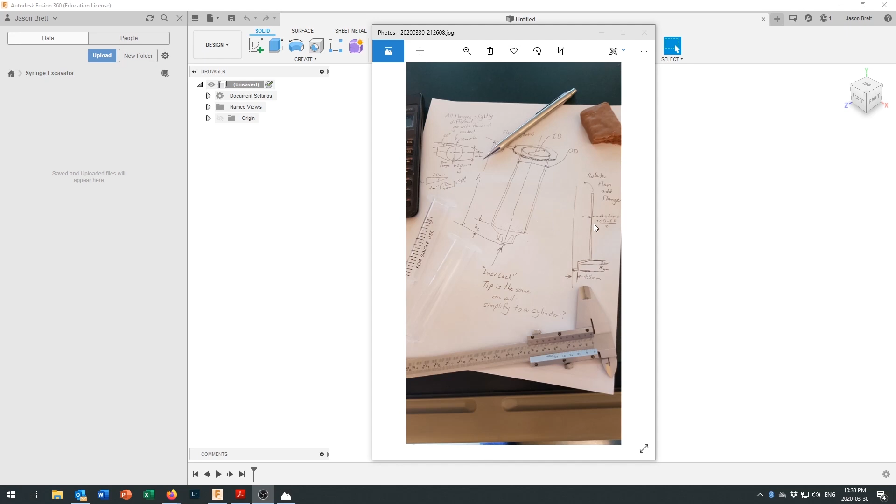And then what we can do is come back and pop the top flange on at the top. So I've gone through, taken some measurements, and taken a few more measurements since I did that drawing, so I've got my notes on there. I'm just going to drag it off to the side and put that on my other screen so I can get started here with a new design.

What I'm going to do is start with a new design, and I'm just going to save that as syringe body before I get started.

And you know what? I'm going to start with a 30 milliliter syringe body right here. I'll model 3 different syringe bodies, but I'll make it parametric so that once I've got one of them done, the rest should be easy to do.

Even when we're going to use the revolve command to create our part, we are going to start off by going into sketch and creating the sketch of the profile that we want to revolve. So let's create a sketch, and you can pick whatever plane you want to work on. When it comes time to assemble them, it's not going to matter that much.

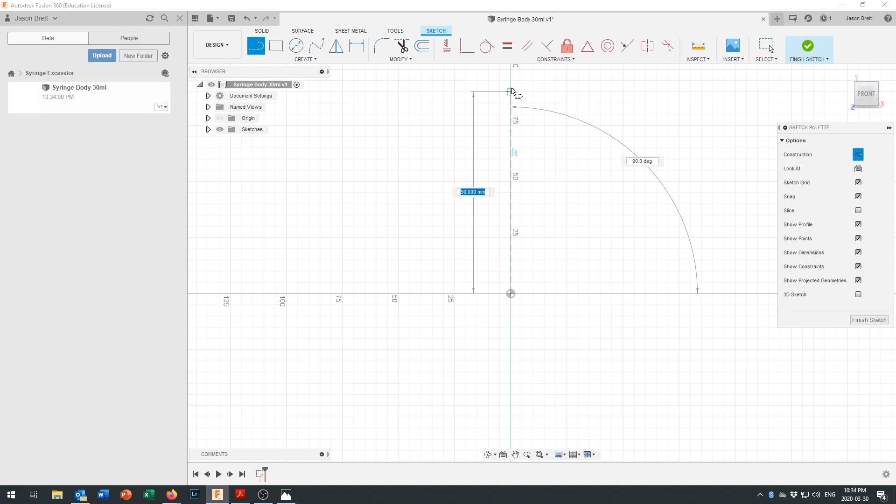Let's give ourselves a construction line to work around right here. We'll take that line right there and start right at the origin. Our tallest syringe is the 30 milliliter syringe, and it's 118 millimeters high. So let's just set that line right there and click that little green check mark. Now we've got a construction line that we can start working around.

I will turn off the construction right here so that we can get started creating our profile. Now I've taken some measurements earlier, and like I say, we're going to simplify this tip right here. So what we're going to do is just draw a line right here, and our profile is going to come out this way.

Officially that's going to be 4.5 millimeters. We'll come back and tidy that up in just a moment. Then it is going to come up this way, and it is going to come up 8 millimeters. So I'm just going to put that in right there.

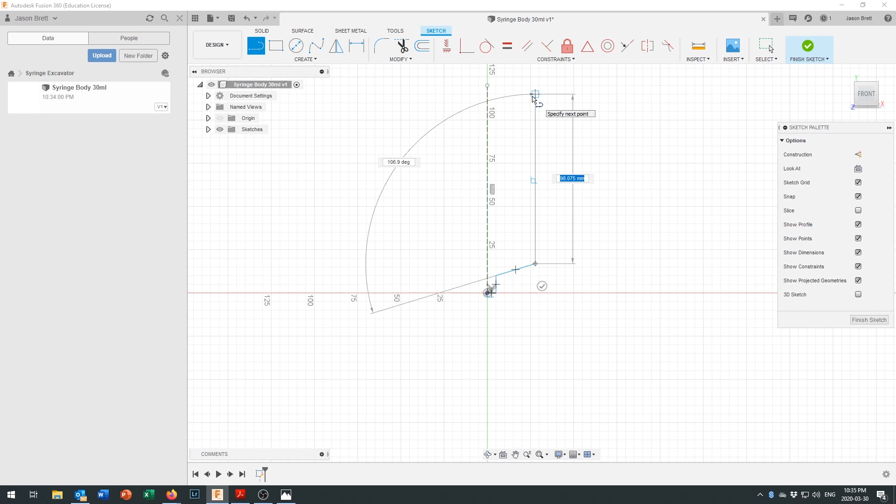It is going to come out at an angle this way, and I don't want that to lock to any specific angle right now, so I'm just going to hit that right there, and then it is going to come up to a height somewhere right in here. And now I'm going to say that's okay.

Now I'm going to come back and tweak those dimensions that I've got coming along right here. So I said this one right in here was not 5, it was 4.5, and that'll be pretty standard for most of the drawings. This one right here was not 9.8, but it was 8 millimeters.

And we've got a couple of ways of dimensioning this. You can dimension the angle, and what I found was that you can dimension from this point to this point right here. You can get an aligned dimension. We don't really need that.

We know that that is going to come up here, and that actually from that 8 millimeter tip where that comes up, that only comes up about 2 millimeters. Okay, now that shrunk that in a whole bunch because it was keeping that angle for it, but that's okay.

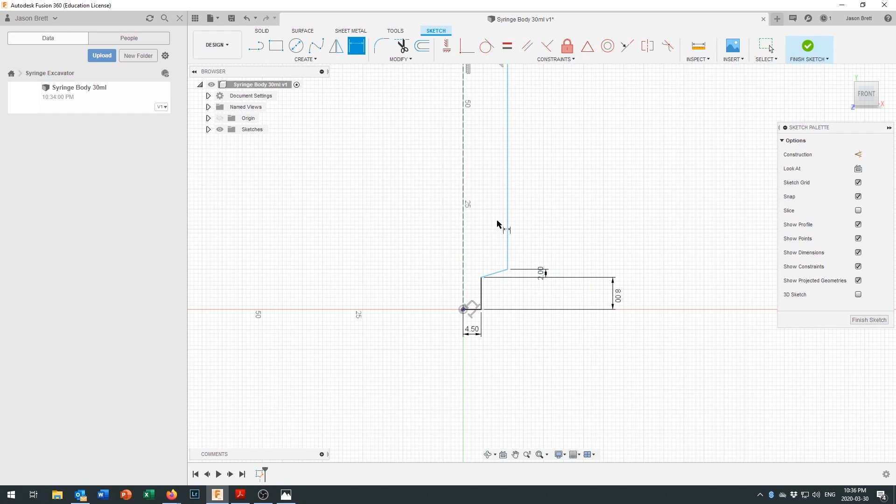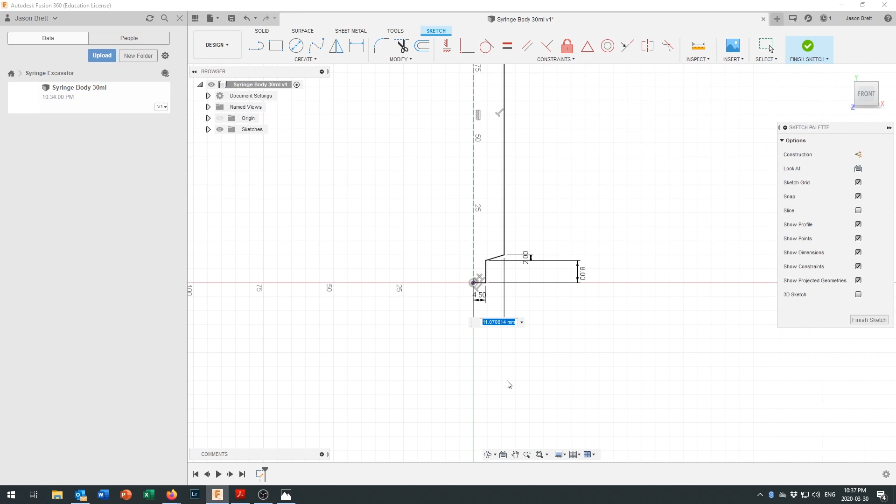That's not to worry right in there, because what we're going to dimension now is our distance from here to the center line. This is going to form our outer radius, so half of our outside diameter. On the 30 milliliter syringe, it has an outside diameter of 23.5 millimeters. So this will be 11.75 millimeters out to right there. And that's going to give us our 30 milliliter syringe.

Right, one more dimension, the height. The dimension from right here down to right there is, on the 30 milliliter syringe, 118 millimeters.

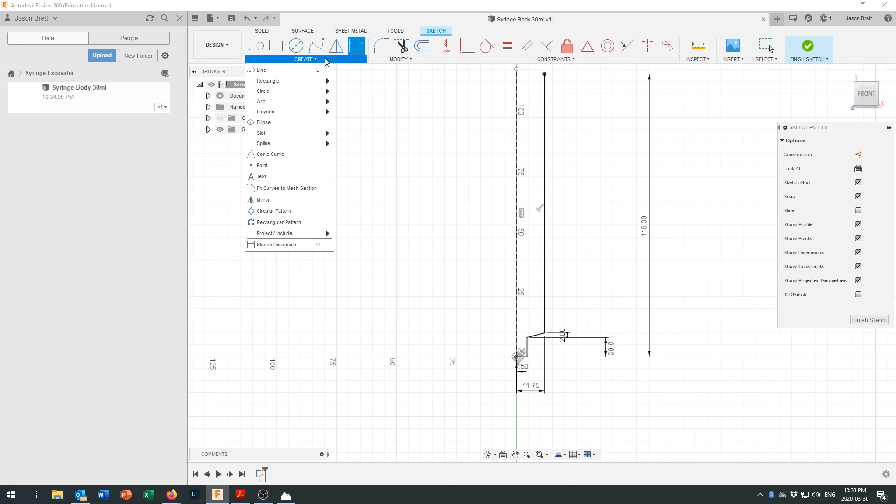Okay, now this line right here, we've got a couple of different things that we can do to draw the inside part of it. What I'm going to try first is doing an offset of it, because I took a couple of measurements, and pretty standard wall thickness is about 0.75 millimeters. So if we take that line—I can never remember if it's under create or modify.

There you go. You could just type O for offset if you want, and take this line right here, and we're going to drag it that side. As you can see, it's a pretty smart offset feature. It actually comes up and inside right here. So I'm really, really liking that feature.

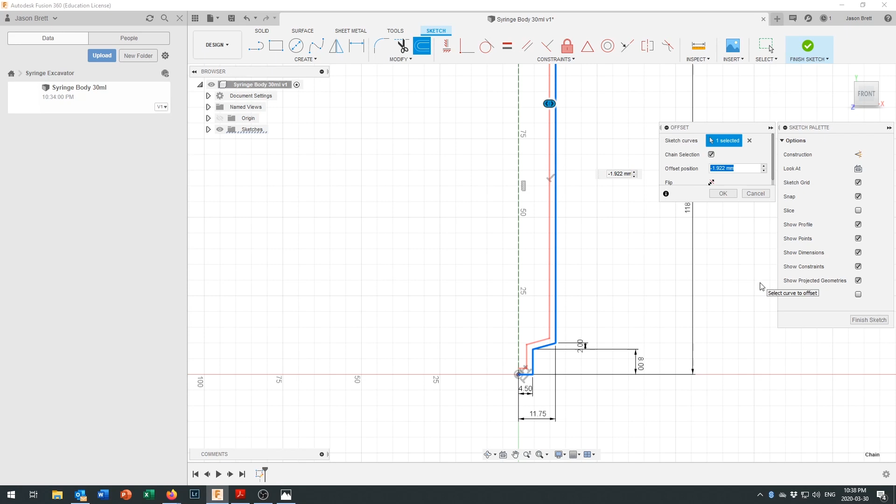And it is only at minus 0.75. That gets us on the inside right there. So that's pretty fine. That's good. Then just to finish things off, come into the end right here and draw a line connecting this end to that end.

Zoom in down here, pardon all my random zooming. And then we draw a line to finish things off at this end. You'll see that goes blue, indicating that we've got a solid model all the way across there, an enclosed profile that we are going to be able to rotate.

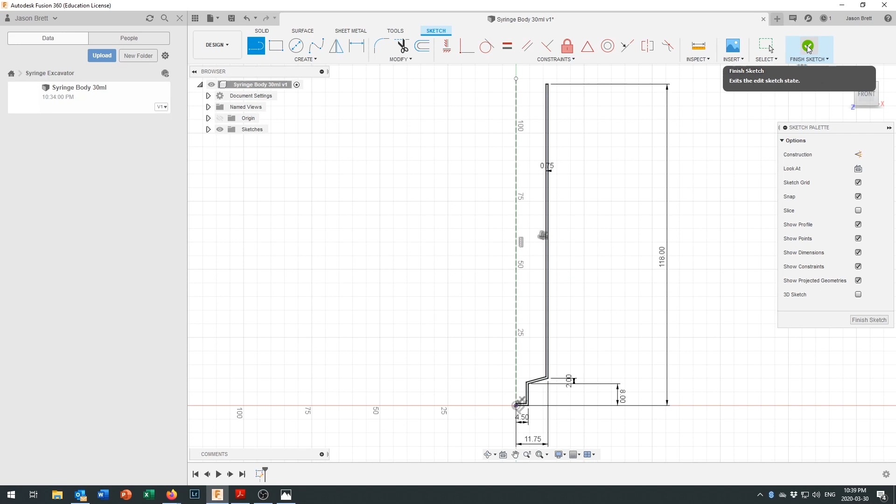All right, that is our sketch, and it looks about right. Let's finish the sketch and see what it looks like when we rotate it. We're going to come in here and tell it we want to create a revolved object, and our revolve dialog pops up. It says one profile has already been selected - that's our blue line right there. It needs to know the axis to revolve it about, and that's why we made that handy line right there.

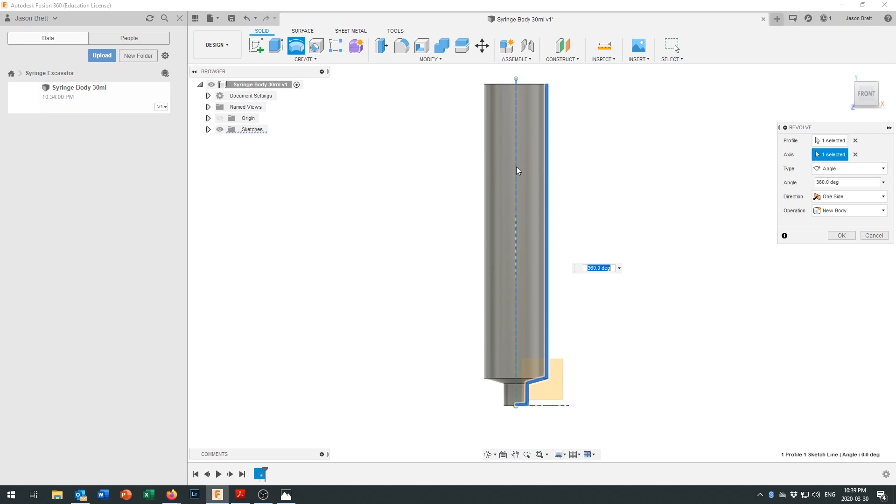Now you can see that is revolved around and created that part as a new body. And that looks surprisingly like a 30 milliliter syringe. Proof will be in the pudding when we come back to modify the dimensions, and then when we go and create a drawing of it and print them out when we're all done. So there we go, that looks okay. I like that.

And now we just need to put a flange on the top right here. So to create that flange, we're going to create another sketch, and we're going to create the sketch right on that plane right there.

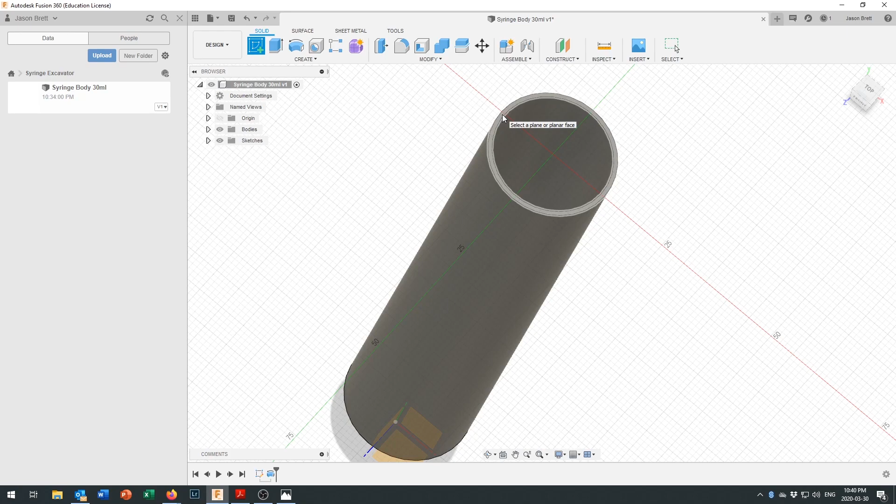There we go. So now what's happened, it's not only aligned that plane with a center right here and aligned it all right around in here, but it's also lifted us up in three-dimensional space. So what we're doing is we're creating our sketch right on this edge, right in here.

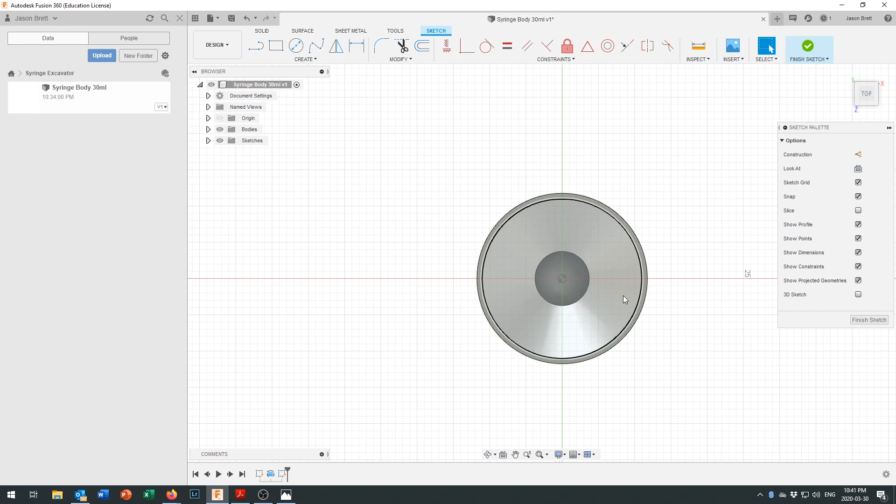So there's a few things that I noticed when I was marking this out, and that was that the object is symmetrical about two axes. So we can actually create a construction line right along here.

Now, before we do that, I am just going to do a projection, and I'm going to project the outer circle right on there, just to make sure that we've got those edges available to measure to, and also that we've got the centering position for it right on there.

So let's create a construction line, and let's go OK. And actually, I had construction turned on - we created that as a construction line. That's perfectly fine. And let's create a construction line that comes right through here.

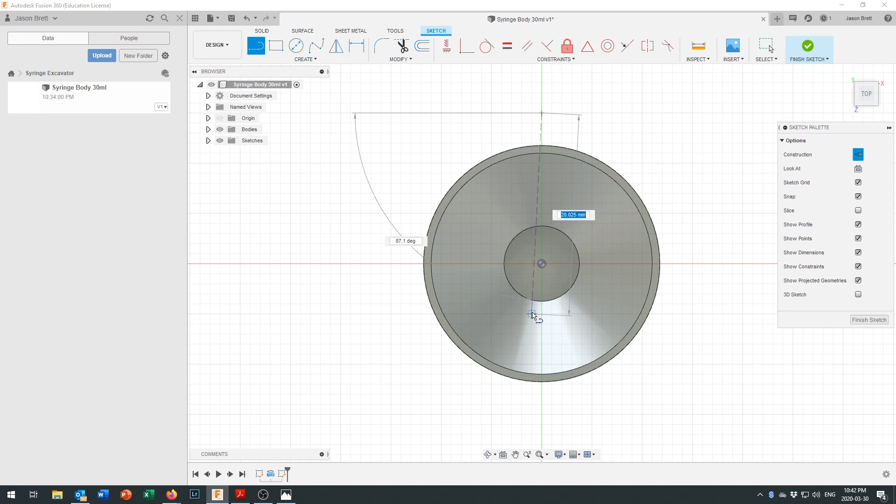Actually, let's draw it right to there so it comes to the origin, out to here, check mark that, and then we'll place a point right here. And that's just to make sure that these all know that they're starting right at the origin and coming out at 90 degrees.

Okay, so those are all perpendicular to each other and all based at the origin right through there, so that when we use that to do some mirroring, we've got some axes to mirror our lines about.

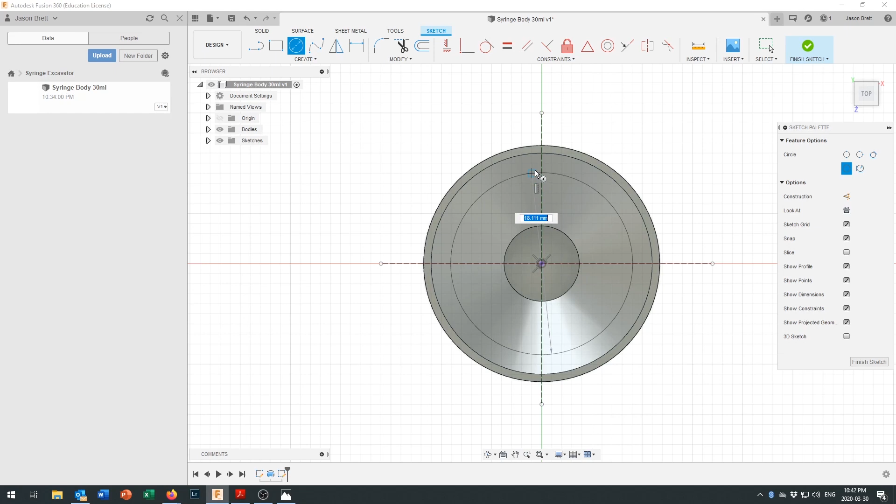And what I'm going to do right here is just looking at the geometry as I sketched it out. I'm going to turn off my construction lines now - I want some real lines right here. And I'm going to approximate this geometry by saying, well, at the outer edge, it's kind of rounded right in here.

And the distance from this edge right here, that outer edge that we projected, to that one right there, the wall thickness at that flange up at the top, I measured that to be about 3 millimeters. So that comes out that way, about like so.

And on our 30 milliliter syringe, we've got a line that comes out, and it comes to about 20 millimeters out this way. So somewhere 20 millimeters from center to edge right out here, we've got a point that's going to come right up here and come around and form a line that comes out tangent to that.

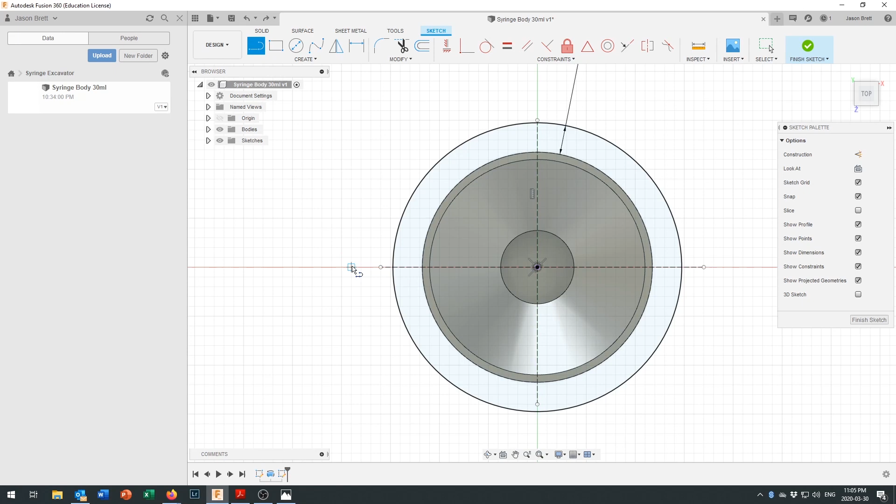So we're going to start by adding a line coming down right in here at about 20 millimeters, and another line coming up from right here. So this one's going to come in here, and it's going to start somewhere about right here, and it's going to come up pretty vertically right here, and then it's going to come over here, and it's going to join and be coincident with this circle and tangent to this circle.

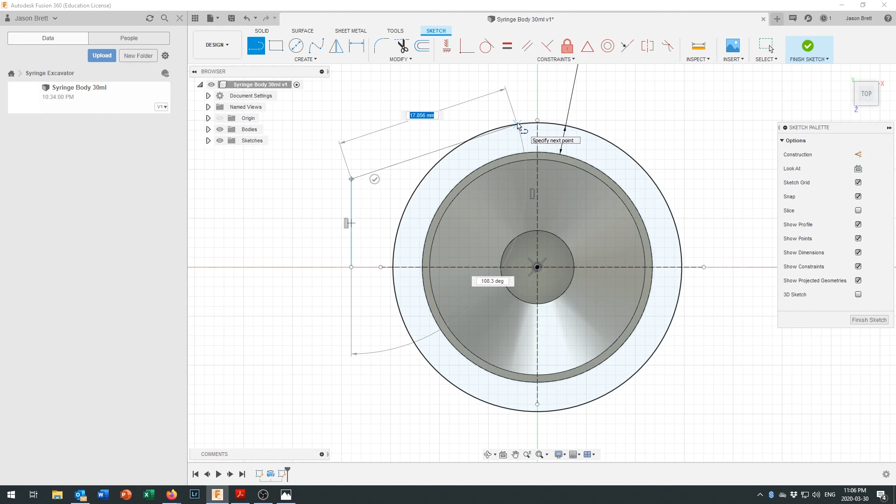So you can see I've got that X indicating that I've got a lock happening on right there, and right now it's not tangent, but we'll take a look at that in just a moment.

Okay, so we've come in there, and that one is not tangent right now. Let's just hit escape so we stop drawing lines. We've got all of our constraints up here, and we can apply constraints to things, and we can tell it I want this line to be tangent to that line right there, and you can see that snaps in and it makes it tangent. Now, if you ever want to see what the constraints are on something, just click on it and click what it's connected to, and you can see right there that I've got two constraints showing up.

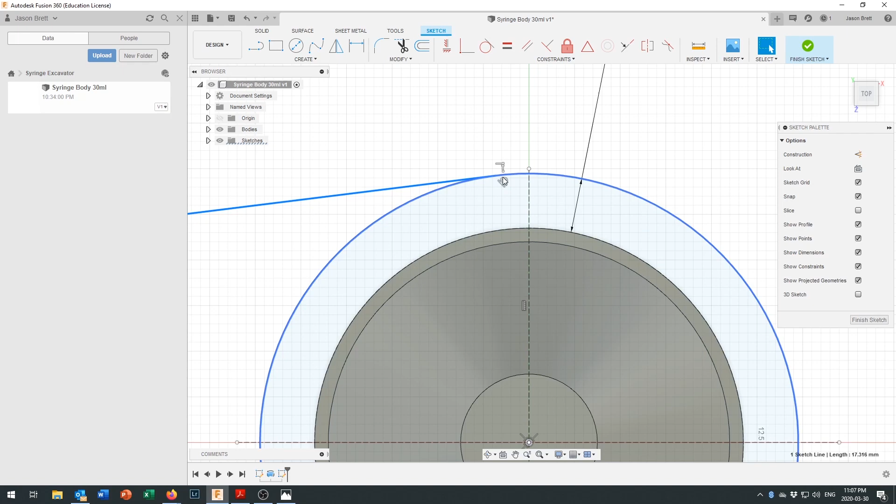One saying that it is coincident, in other words, that it means that they have to touch, okay? And the other one saying that it's tangent, the point at which it touches is going to be tangent to that circle right there. Down here, you can see this line has a constraint saying that it is going to be vertical. So I'm good with that. This is a rough outline of what we got. Now, of course, it's rounded in the corner on our syringe, and that's easy enough to add with a fillet.

Let's add a couple of dimensions first. And we haven't dimensioned an angle before, so we're going to take this line right here, and we're going to dimension that line relative to the vertical line. And I did a little bit of measuring and math earlier, and it's going to be 20 degrees off the vertical, so I could either measure 110 in that direction or 70 in that direction. And just for the point of keeping it off of the drawing, I'm going to measure it 110 right in there. Okay, and you can see that just changed the angle.

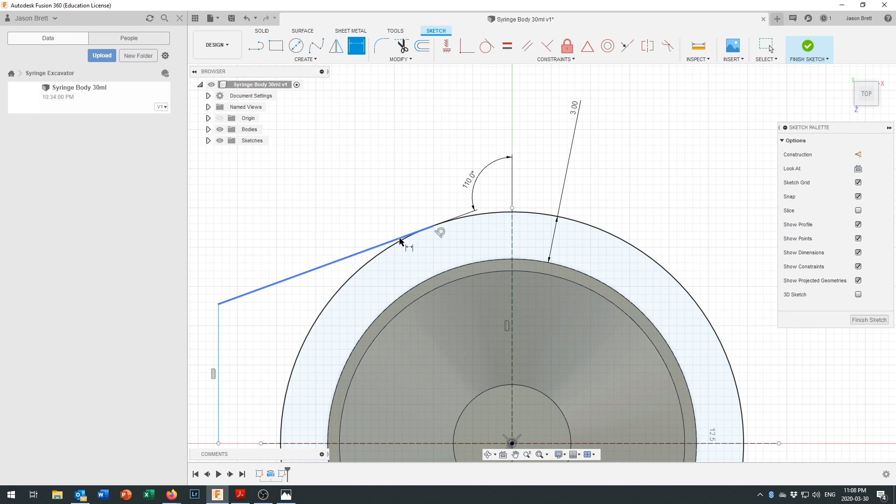And although it looks like it carries on past here, really the line that we're looking at right here comes in as coincident and tangent. That's just a measurement line coming out right there, a little extension line for doing our measurements. Okay, and I've measured the large syringe, and I know the dimension from right here to the middle. Let me find an appropriate place. Actually, why don't I put it up here? The rest of my dimensions are up here. That's going to be about 20 millimeters in the large syringe.

And then we are going to fillet this corner right in here. And it's got a little bit more than 2 millimeters radius on the fillet. Let's go with 3. And I think that'll approximate, close enough for our purposes, the shape of that corner right there. Now, like I say, I only drew 1/4 of the overall object because we can come along and we can use the mirror command right here. Technically, we could probably do a circular pattern, but let's use mirror.

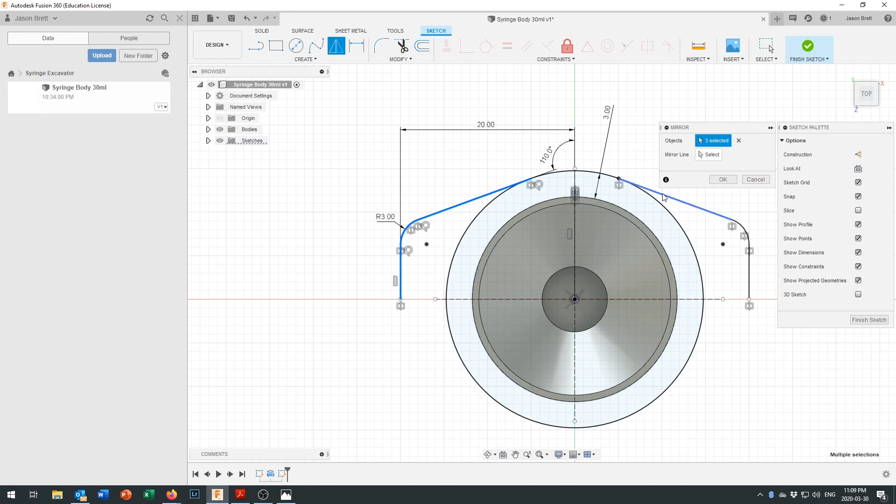And I'm going to take that object, that object, that object, and then I'm going to select my mirror line right here. And it's going to pop across right there. I'll say that's okay. And then I will do another mirror command, and I'll take this object, this object, this object, this object, and then I will mirror it about that line, and I'll say okay. And now we've got something that looks kind of like the flange that comes off the top of the syringe. We can finish our sketch.

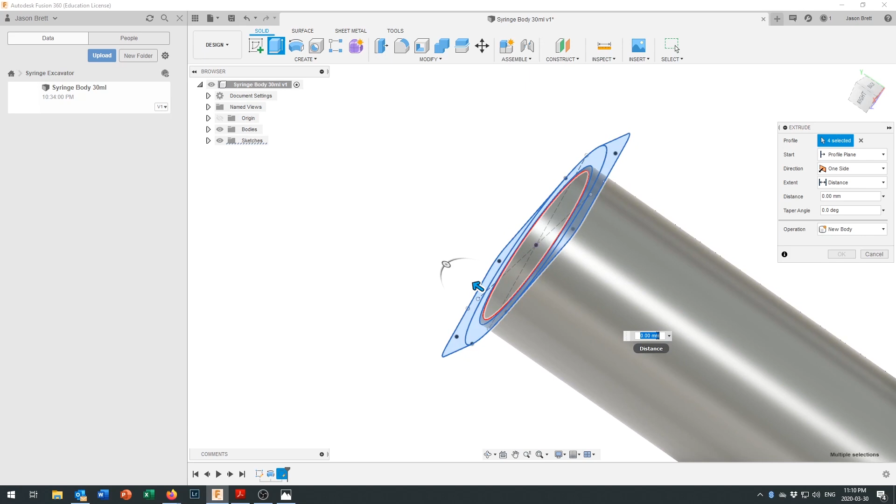We can rotate this around so that we can see what we're looking at right here. And let's do an extrude. And we are going to extrude this, this, that. Don't forget to extrude the edge. Now what's interesting is it's going to extrude it up this way, but the way I took my measurements, I measured from the top of the flange to the bottom of the tip. So I want it to extrude down in this direction. So instead of extruding a positive distance, I want to drag it backwards and go a negative distance.

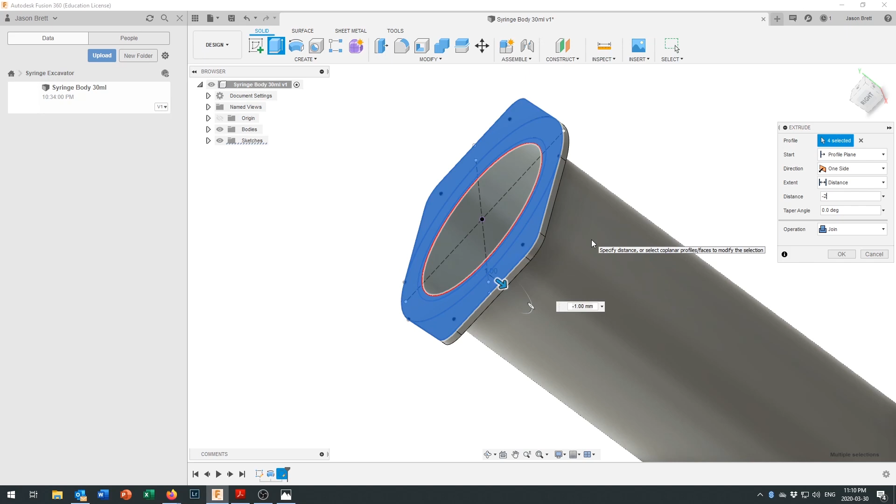Now normally when you extrude in a negative distance, it automatically turns into a cut. We're going to tell it we want it to be a join. And the distance that we want to have our negative extrude go through there, the flange thickness, is a dimension I haven't measured. Let me just grab my calipers and take a look at that. That comes out to about 2 millimeters. So negative 2 millimeters right in there seems representative of flange thickness. There we go.

And that is looking like a 30 milliliter syringe body. So there's one more thing that we want to do. I'd like to make this a little bit transparent, kind of translucent. So to make it transparent or to make it look different, we can come under modify and we can change the physical material. And the physical material does more than just change the appearance.

The physical material actually changes properties such as density and strength, so that if we were to do an analysis on it, it would change the weight of the syringe, and it could tell us exactly how much it was going to weigh and all sorts of good and useful things like that. Let's see what plastic choices we have available to us.

And they've got acrylic, clear, epoxy resin. We're looking for something kind of translucent. It's probably made out of something like polyethylene or polypropylene. So we've got a polyethylene terephthalate plastic that we could try in here, a PET, and that makes it somewhat transparent, but it's not entirely transparent.

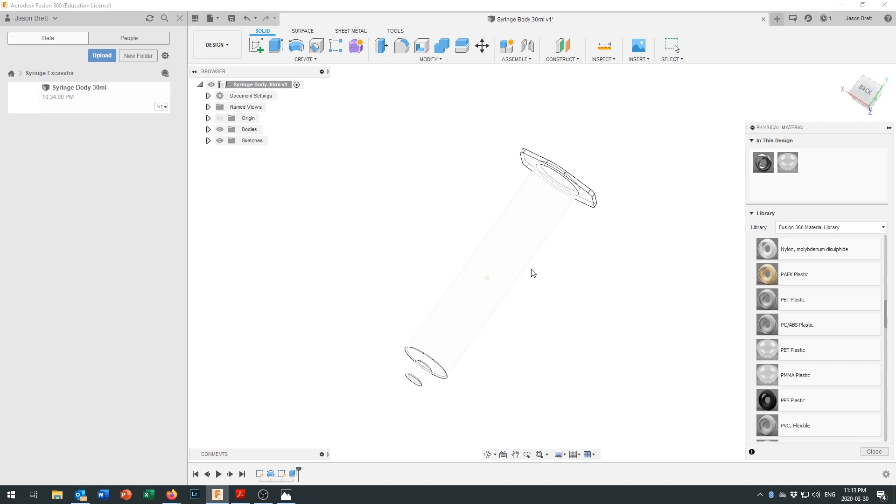It's somewhat opaque, and that might be good later on, just as we put the syringe plunger inside it, just so we can see it moving up and down in there. You can try a different material if you want. That was PET plastic. It's a little bit too clear. It's got all sorts of interesting ones in here.

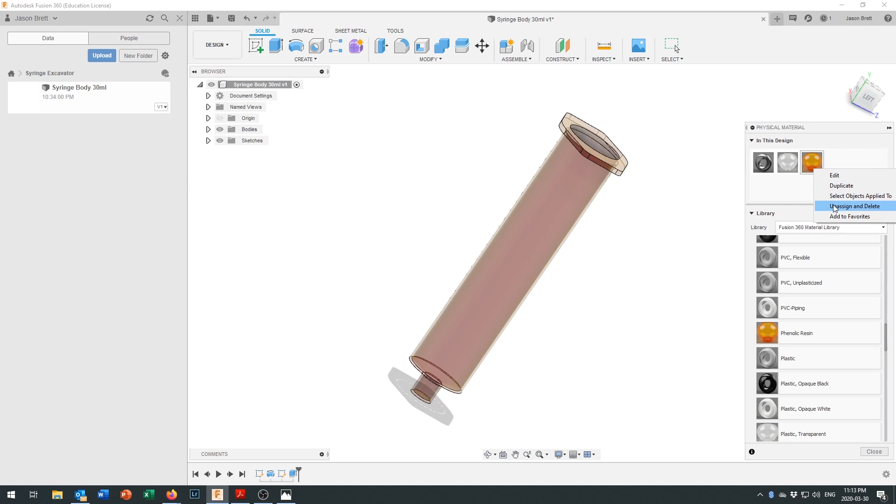You could put a phenolic resin on it. I don't think we want that. Get rid of that. Unassign and delete. What else? Steel, unassign and delete. We don't need that in there. Okay. Anyways, we're dragging that around. We're goofing around. Drag your PET plastic on there, and it ends up looking pretty good.

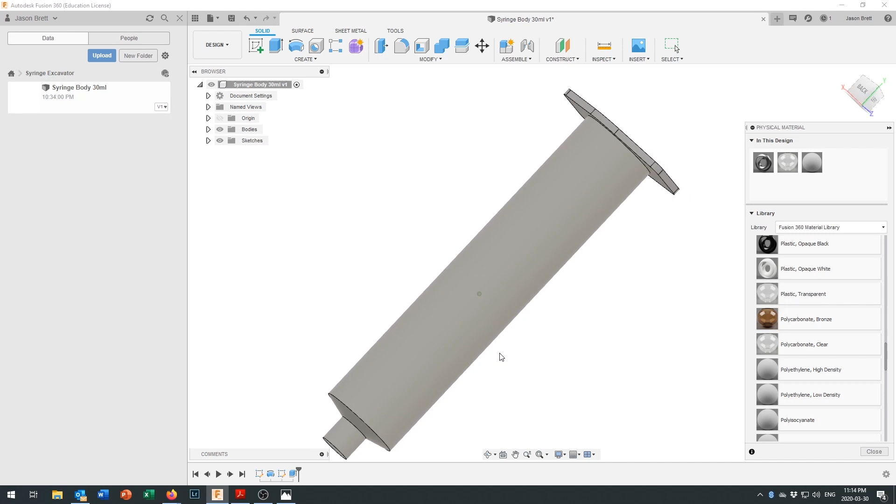Oh, here's polyethylene. This would probably be a high density polyethylene. That might be a better finish, except, oh, it is. Is it slightly transparent in there? Ooh, that does really look like polyethylene. You can just barely see through it from some angles. If you're ever unsure, you can always render it up.

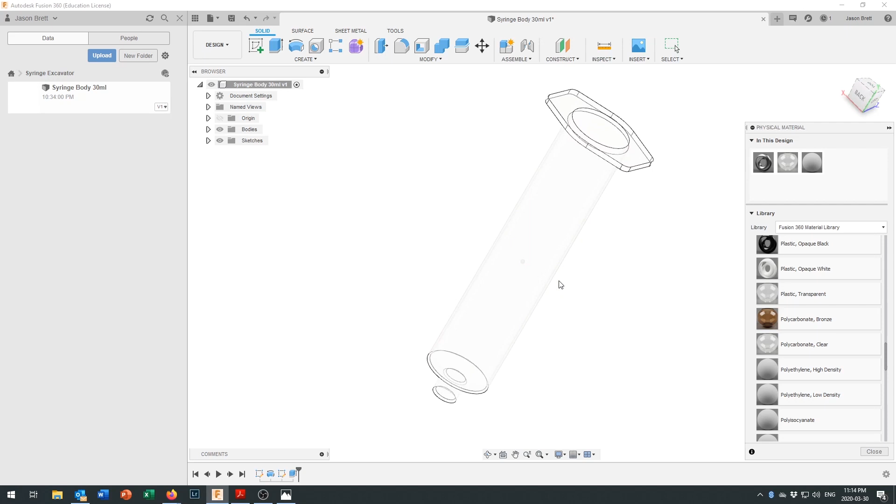I think I like the PET better. It's not exactly what it looks like, but for our modeling purposes, I think that's going to do great. Okay, so I'm going to call this the 30 milliliter syringe, and that's going to be the body, and I'm just going to save it.

Okay, then I'm going to go through and I'm going to change some of the dimensions on it so I can get a 20 milliliter syringe. So right now I'm just going to go save this as syringe body 20 milliliters. So make sure it's saved under a new name. And then I'm going to go change some dimensions.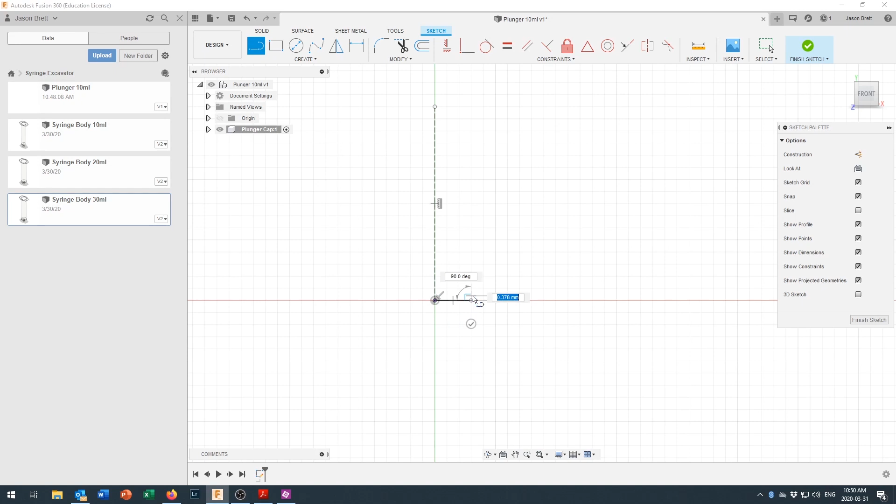Again, before I started doing this, I sat down and did some sketches, so I know that I want to create a rotational object. So I'm just going to bring that right down there, and I'm happy with that. I made that a construction line. Then I am going to take a line right here, and it is going to come out a certain distance. We'll get those distances just right. It's going to come up over here, and then it's going to come back down.

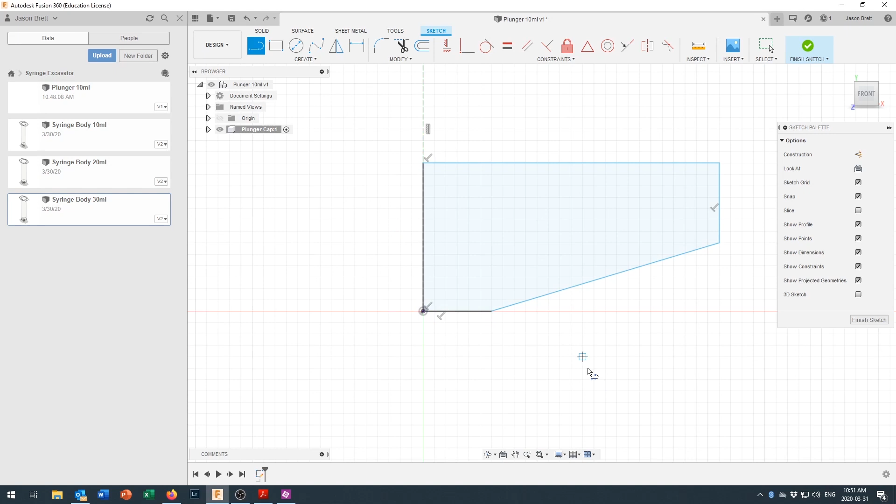And that should become a final shape. I'm not sure why it's not showing me, there we go. I had to come back and create that extra line so that you can see it went blue, which means it's an enclosed shape. Now I'm going to apply some dimensions, and I've already done my measuring. Down here I want this dimension to be 3.75, and this vertical dimension from that point to that point to be 2 millimeters.

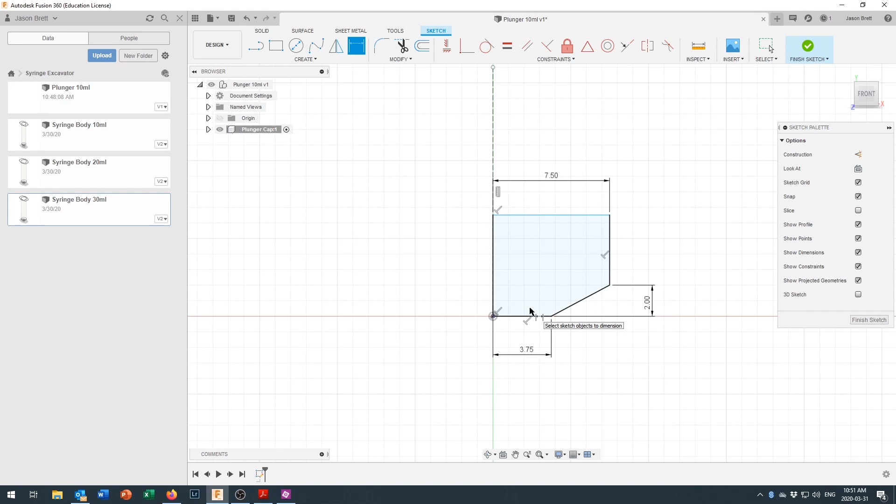My 10 milliliter syringe is going to have an inside diameter of 15 millimeters, so that will be a 7.5 millimeter radius right there. And that is the approximate dimensions of the plunger on the 10 milliliter syringe, just holding up mine to take a look at it. Oh, I'm missing one dimension right here. I need to tell it how tall it is. That's why it looks wrong. It's too tall.

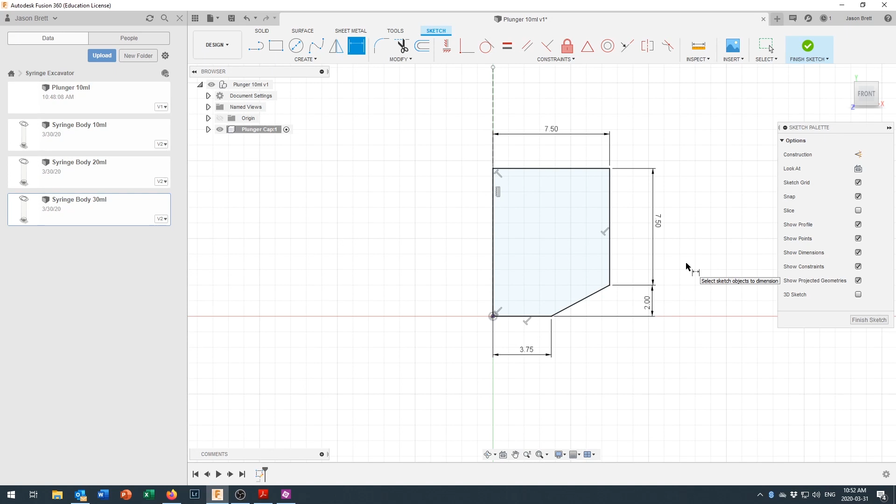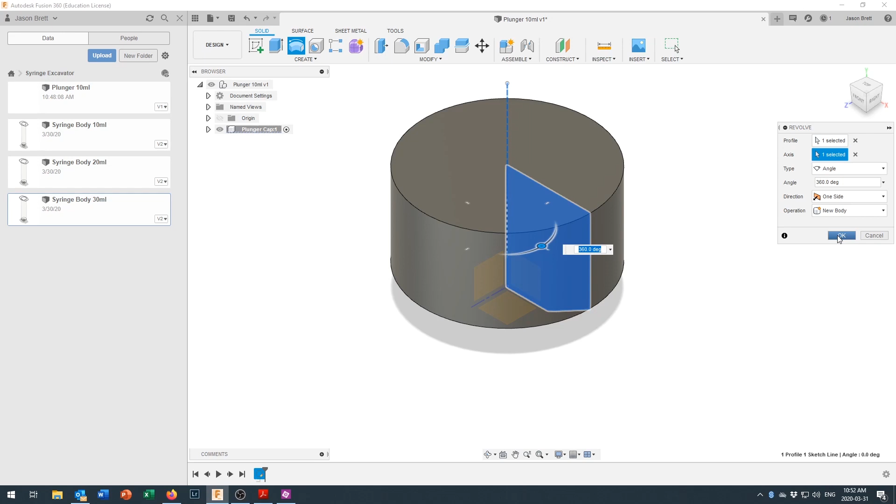And the measurement on there is 7.5 millimeters for a 10 milliliter. It looks big, but that's because I haven't rotated it yet. Let's finish the sketch and take a look at it in a three-dimensional perspective. We've got one profile selected. Let's select the axis, and that looks more like what it should. And I will just say okay.

And here we have that little plastic cap at the end of the syringe. It's going to be in black plastic. So I'm going to right click on the plunger component and go to physical material, and it's not an acetal resin or a GFRP. It is plastic opaque black. It's actually something stretchier than that, but we're not going to be running stress tests on this.

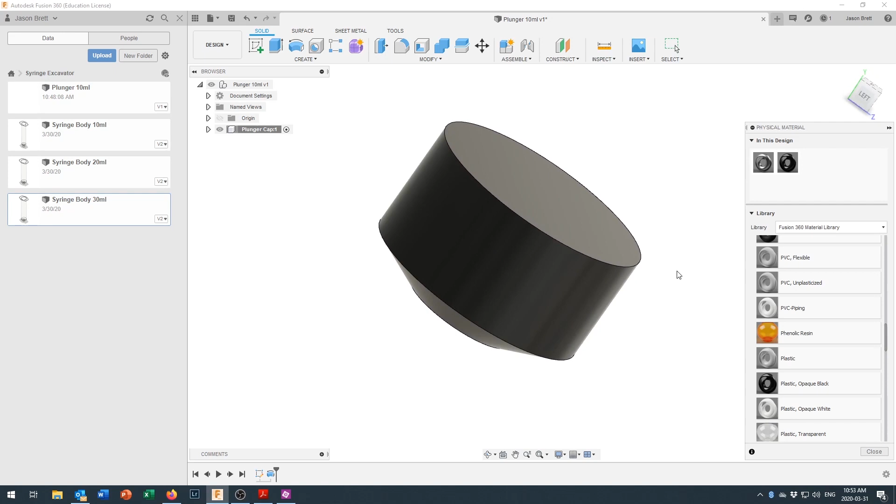So there we go. We've got a plunger cap right in there. Now I am going to close that because I'm happy with that material. I've got my plunger cap in here as a component. Now I can come along and create a new component.

And it's going to ask me, where do I want to start drawing for component 2? Well, I'm going to start drawing component 2. This is going to be the shaft of the plunger, and it's going to come up right from that plane right there. So by clicking that on there, I can come in here and call this plunger shaft or piston shaft or whatever you want to call it.

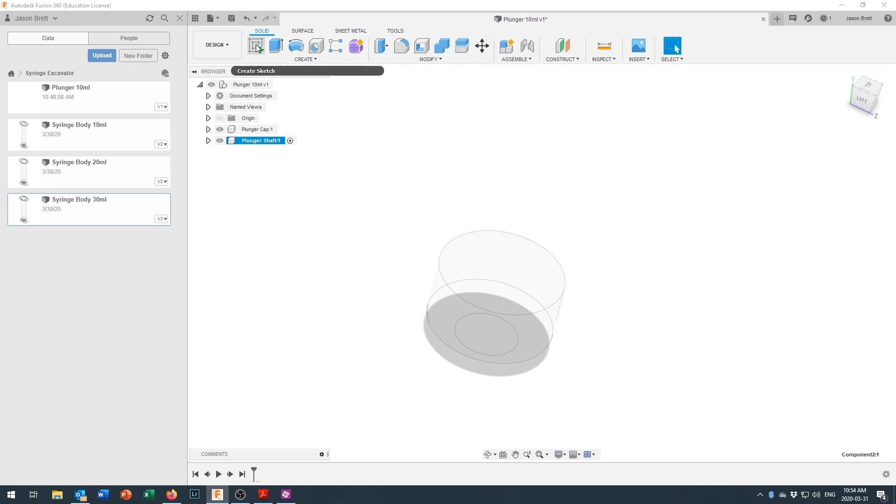And we are going to start by creating a sketch right on that plane where we began. And all we're going to do is we're going to project the outside diameter right there. And then we are going to finish that. And we are going to extrude this up.

Oh, why did it pop me back into sketch? I did something wrong there. Finish sketch is what I want to do. I must have clicked on the create sketch instead of the extrude. I want to extrude that by a distance of 1 millimeter.

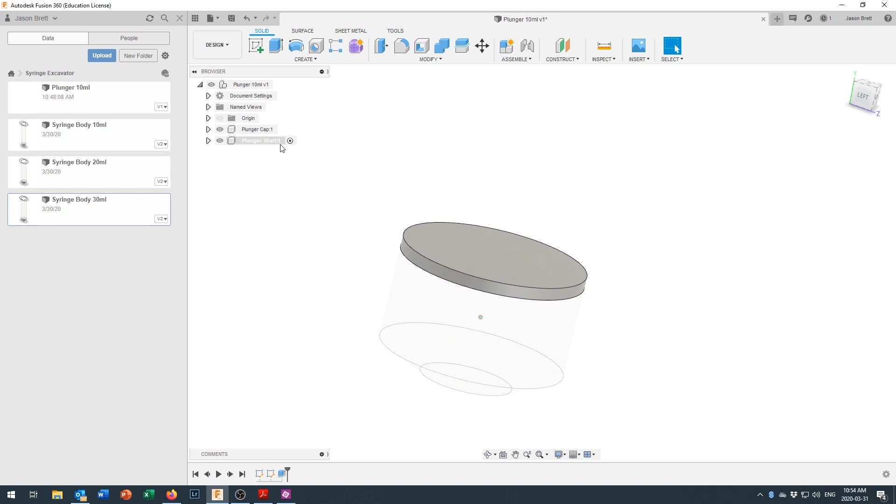Okay, and now you'll see something interesting happen right here is that because I've got the plunger shaft component selected, you can see the little dots on there. I'm doing all my work inside plunger shaft, and it's kind of grayed out the plunger cap on there.

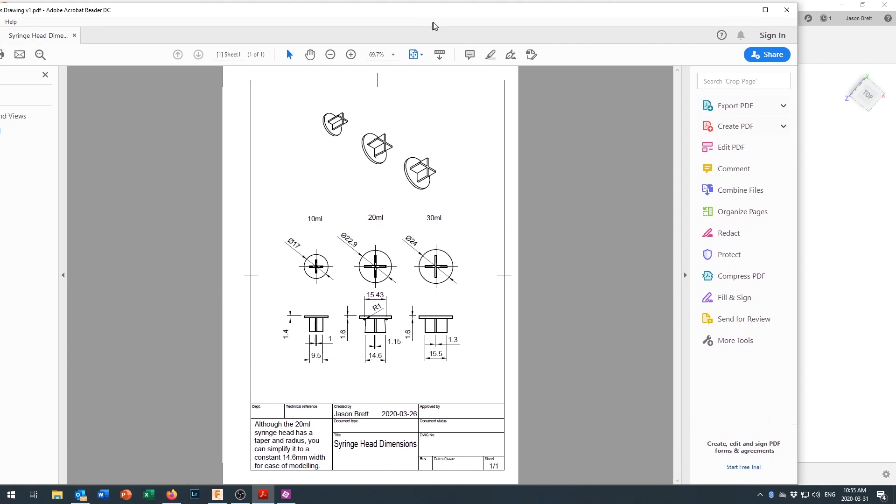Alrighty, so now we need to create the cross section that extrudes all the way up to the very top end of the plunger. And so we've got some dimensions that I may have shared with you in a previous tutorial. And the dimensions that we're looking at are right on here. So for the 10 milliliter plunger, we've got a cross section right here that is going to be 1 millimeter in thickness and 9.5 millimeters wide, centered on there and in a cross pattern.

So let's just move that off to my other monitor right there. Hope you had a chance to jot those dimensions down. If not, you can always rewind a little bit. And let's create a new sketch right on here. And so this time we want to create a new sketch. It's coming in right on here.

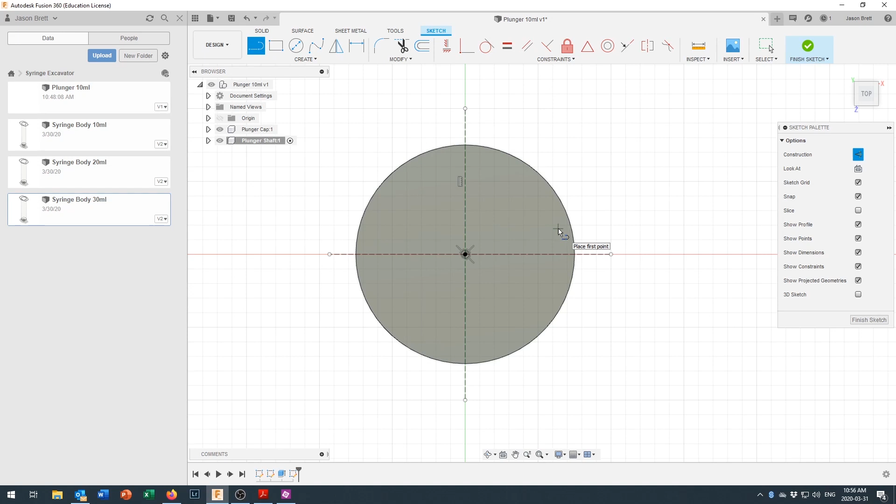And we're going to start with some construction lines just so everything comes in nice and square relative to that origin right there. So let's draw some lines. And construction line from the origin. We'll just bring it out to here. Happy with that. Origin out to there. Happy with that. There we go. So I've got my construction lines all marked out to show that everything's going to come in here quite nicely.

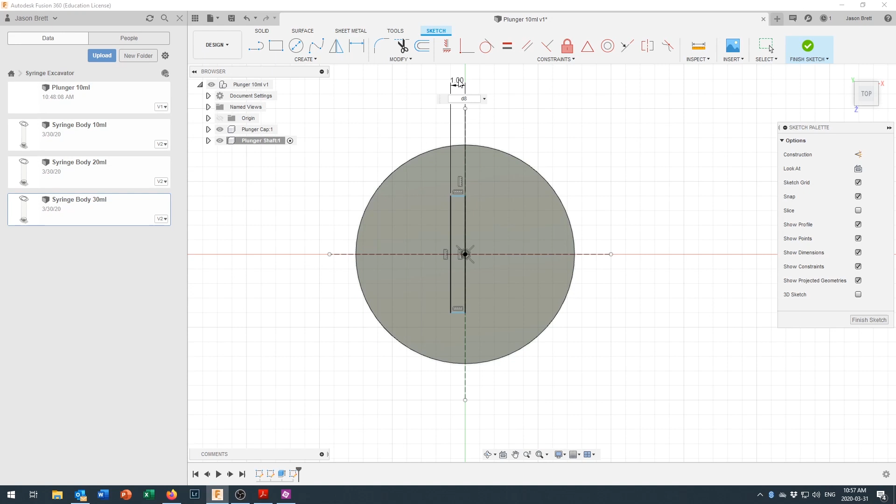We've got a couple of different ways of drawing this in here. And I think probably the quickest and easiest way is to go with rectangles and draw, oh, excuse me, turn off our construction line. We want these to be solid lines now. And we'll draw one about like so for our vertical rectangle. And we can dimension that as being 1 millimeter. And then what we'll do is we'll dimension from here to that line as being equal to this one divided by 2.

There we go. So now we've got our width of that line. We just need to create the height of that line. And the height of that line on this one was 9.5. So this dimension right here will come out to 9.5. And to keep it nice and centered in there, we'll dimension from there. Hit escape. I don't want that dimension. I want dimension from the top right here to that line. Okay,

sip of coffee, calm down.

Dimension, that line to that line. Escape, escape, escape. This line to that line. There we go. Okay, so if you're having problems clicking on things and getting them to come up, I understand. Sometimes you get going and you just have to go back, and thankfully there's always an undo button that lets you sort things out. And there we go. So there is one rectangle right on there.

You've got a few options in here. I mean, you could have just drawn it as kind of a V shape in here and then mirrored it or rotated it. I could rotate this into a different position. There's all sorts of ways to describe this, but now that I've got the dimensions all figured out right here, I'm just going to draw that rectangle in there. I'm going to dimension right here, and I'm going to set that dimension to be the same as the dimension right up there. Okay, so that automatically becomes 1.

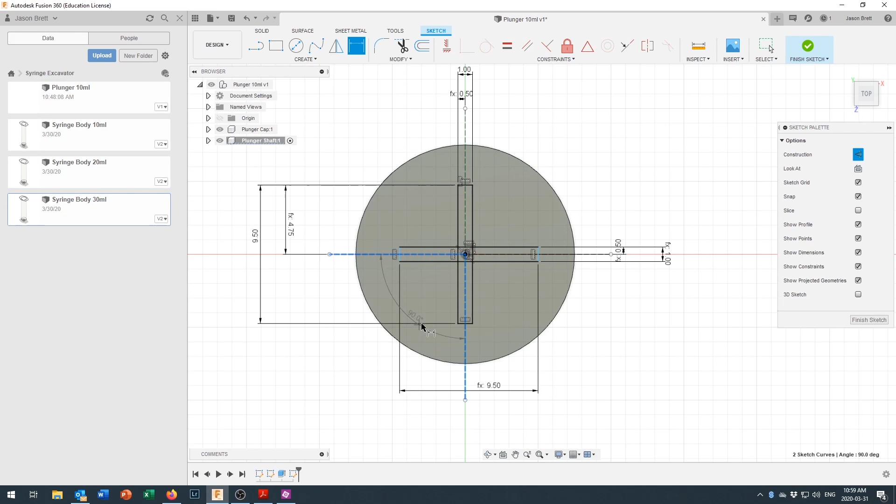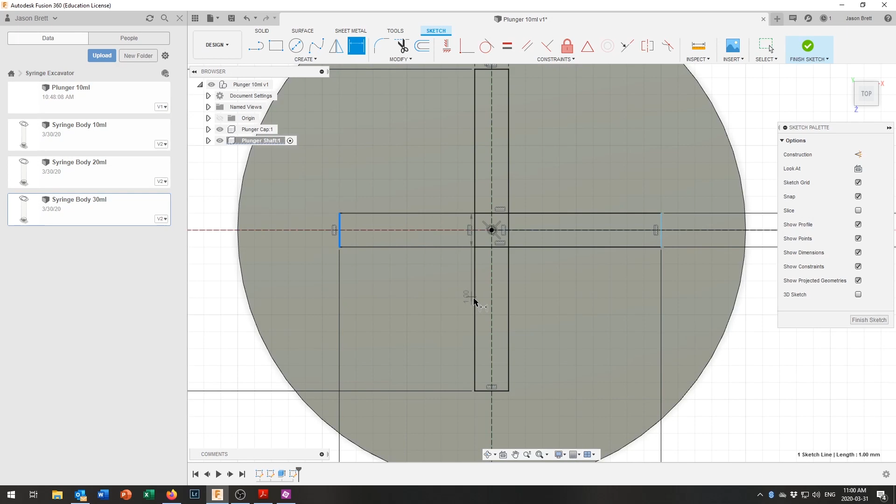We don't need to dimension it as 90 degrees. I don't know why this one is not cooperating. I want to dimension from right there to right there. I didn't have dimension turned on. Dimension. Hit escape several times, clear out what you're doing, pick the line that you want, pick the next line that you want, and tell it where you want the dimension, and then tell it what you want the dimension to be. All right, there we go.

And so now we've got the profile that we're going to extrude to form the basis of the shaft. And we'll take that back to a 3D view, finish our sketch. And so this is going to come right out of here, plain old extrude. And make sure you get all of your surfaces included. And there we go. This one is going to extrude out here for the 10 milliliter syringe. That one has a height of 89 millimeters between the little plastic rings.

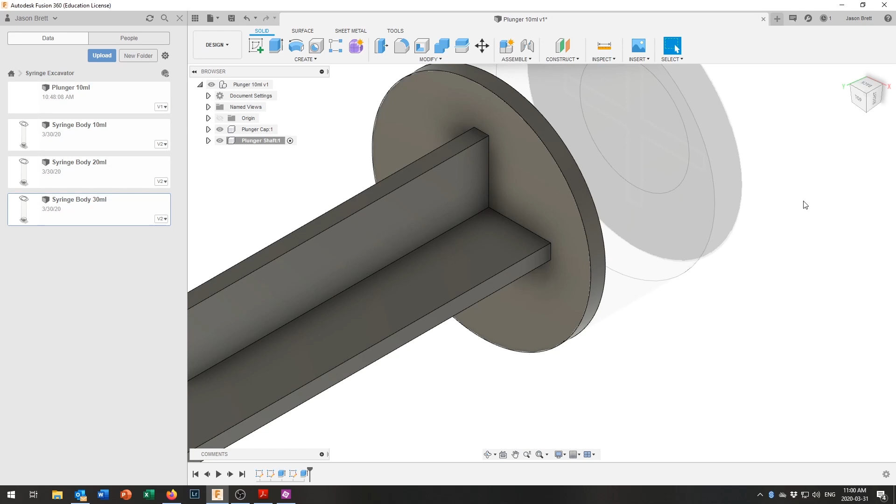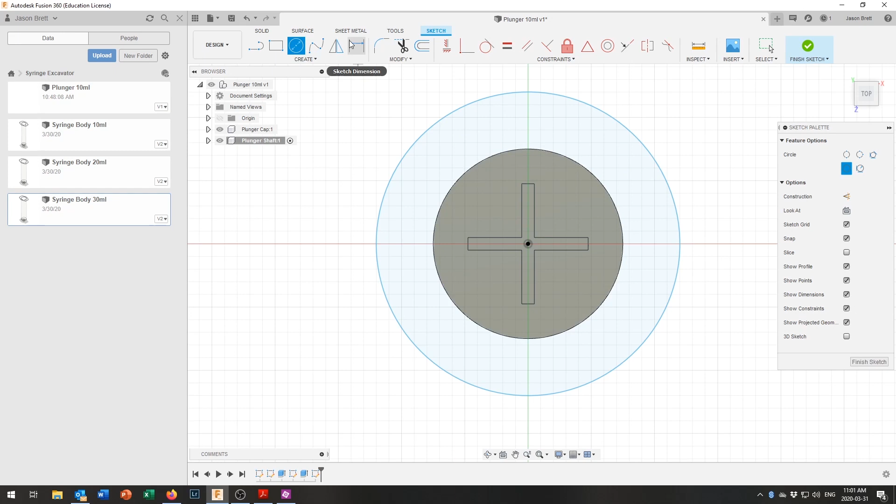Okay, and now we're going to come down to this end right here, and we're just going to put the cap on that plunger right there. And we're going to do that by creating a sketch right here. And this sketch is going to be fairly easy to do because it will be a circle centered on the origin. And for a 10 milliliter syringe, we will dimension that to be, what did we say, a 17 millimeter diameter for a 10 milliliter syringe.

And we will finish that sketch, and let's take a look at it right here, and let's do an extrude of that sketch. Okay, and we're going to take this profile along with it. Otherwise you'll end up with a cross gap in the middle of it, which would look kind of ugly. And that is going to extrude a height of 1.4 millimeters. And there you have it. There is the plunger shaft.

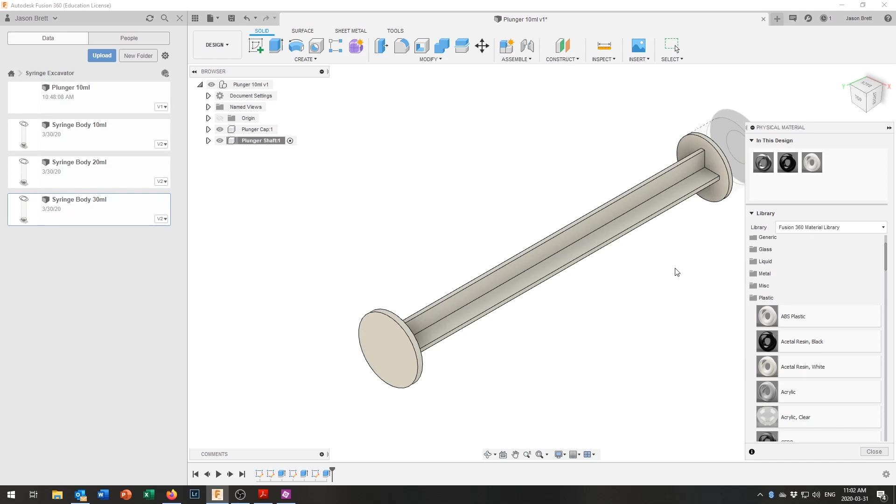Now we want to apply a material to that. And let's come in here and find our physical material. And let's make that just plain old ABS white. And that should show up inside of our much more transparent outside syringe, because later on in this tutorial, we're going to link the two of them together and let them slide together. Okay, going to close that physical material right there. Now you can see that this is still kind of grayed out.

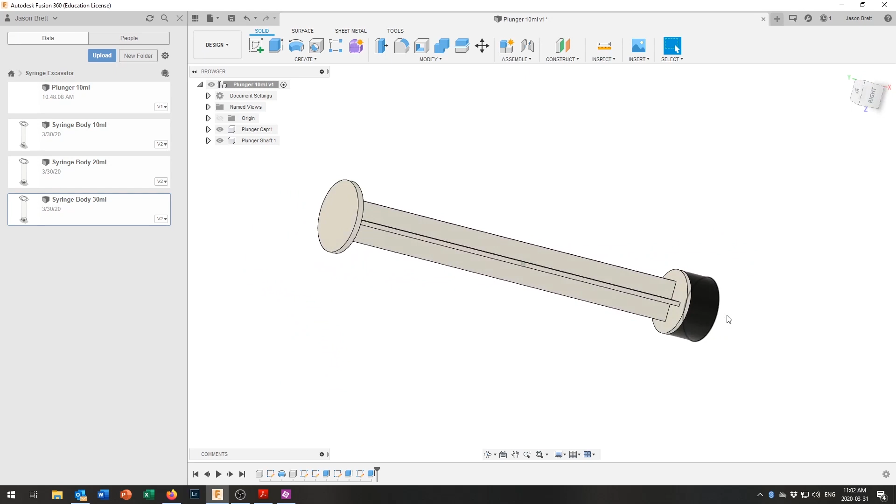If I come back to my plunger up at the top and make the overall plunger the active component, now you can see that we've got the cap on the end and a simplified model of our plunger. We don't have all the fine details right in here. If you're feeling a little bit OCD, go ahead and add them in. The computer will be just happy with that. So what I'm going to do now is go ahead and create plungers in the 20 milliliter and 30 milliliter sizes.

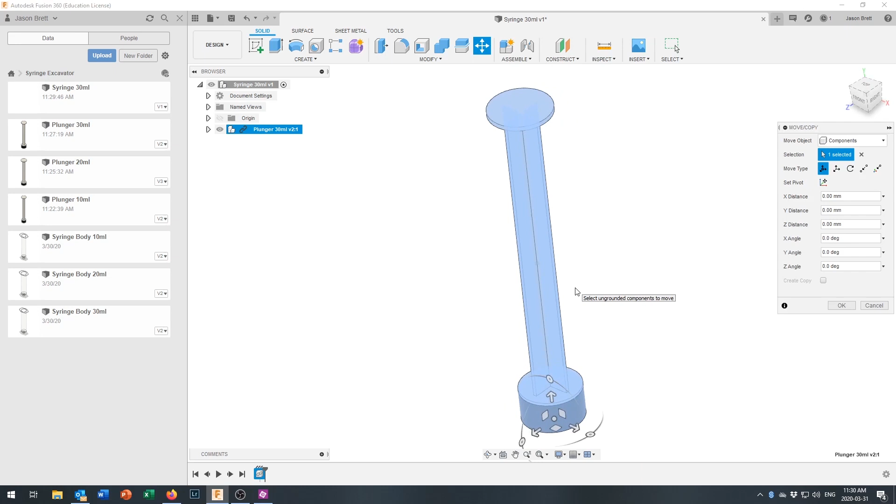All I did was a drag and drop, and Fusion just processes that. Now I have a plunger right in the middle of my diagram. If I want to position it somewhere else I could, but right now I'm happy to have it come in right at the origin, so I'll just click OK.

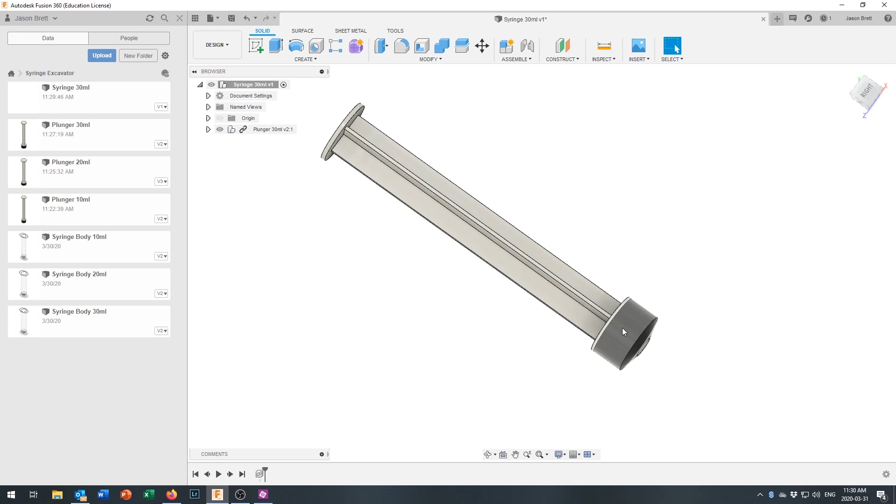This is not that far different from what we had before, except you'll notice if I pick it up and move it, those two parts separate, and we don't want that happening. So we're going to assemble those by making a joint between the two of them. Joints can be a whole range of types - you can have sliders, cylindrical and rotational joints. This is just going to be a rigid joint right here, and we're going to assemble that.

Some components may have been moved because I dragged that to show that they weren't connected, so I'm just going to click continue. It'll put it back where they were to begin with, which makes creating the joint fairly easy.

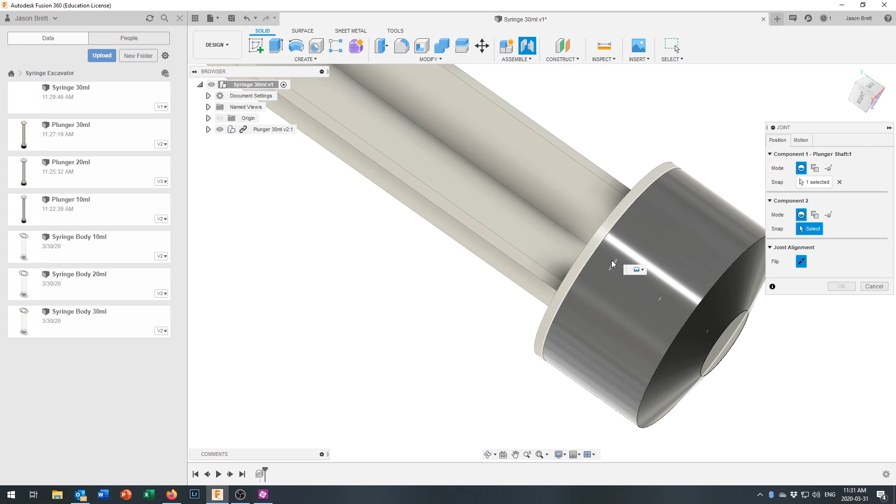Now if you take a look right in here, I'm going to zoom in and select a location on that component that is going to be our joint - right at the middle there. The location on the second component is also in the same spot, and I'm now going to move them around. You can see it wiggling back and forth because that is a rigid joint.

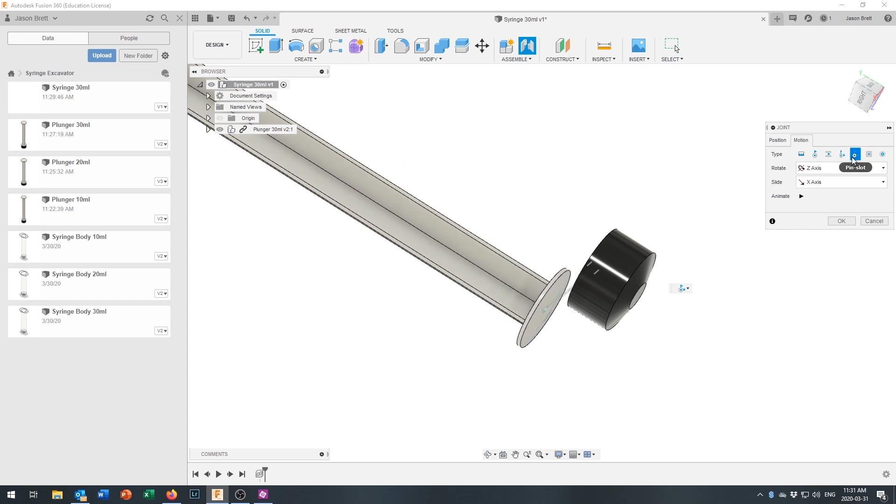You can check out some of the other joints that you could have. You could create a revolute joint where it can spin, a slider joint where it can slide, a cylindrical joint where it can slide and spin, a pin and slot joint where it can slide and rotate, a planar joint so it can move just about anywhere on that plane, and a ball joint where it can wobble around like a ball. So very mechanical thinking.

This one though, the plain, boring, rigid joint, it's not going anywhere. Those two are connected together, so we'll just click OK. What you'll see has happened down here on our timeline now: we've got the component insert, the first thing that we did, and then we've got the joint that we made, a rigid joint, joining those two together. You'll see in our table up here we've got a new entry for joints, and that is rigid one. If you want to do a good thing here, you could come in and rename that cap to plunger.

Not that the program cares, but now if you come back and take a look at that, you'll know what that joint is. As you start to get more and more joints into an assembly, it's nice to be able to have them named so you know what they do.

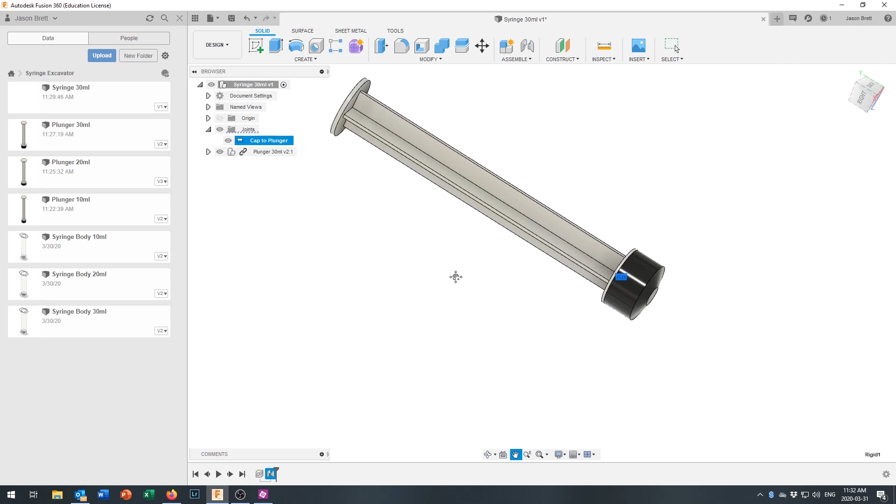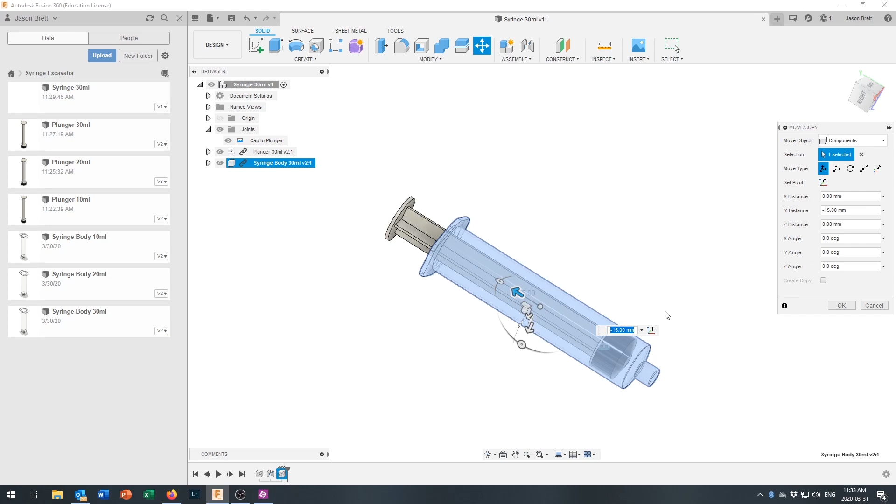Okay, so we've got this all put together, and this was a 30 milliliter syringe we're making, so we need a 30 milliliter body for it. So again, drag and drop - and there is our 30 milliliter syringe. Now, I'm not 100% happy with where that's sitting right now, so I'm just going to use that arrow and drag it down right to about right there, and we'll just click OK.

Now we've got our plunger inside our syringe. Now, the challenge with that is if I move my plunger, it just moves around everywhere. So we want to create a joint to hold the plunger inside the syringe. That is going to be a cylindrical joint because it can slide back and forth this way, but it can also rotate while it's doing that.

So what we're going to do is come to assemble, and we're going to tell it to create a joint for us, please. Again, some components have been moved - I just moved that out of there.

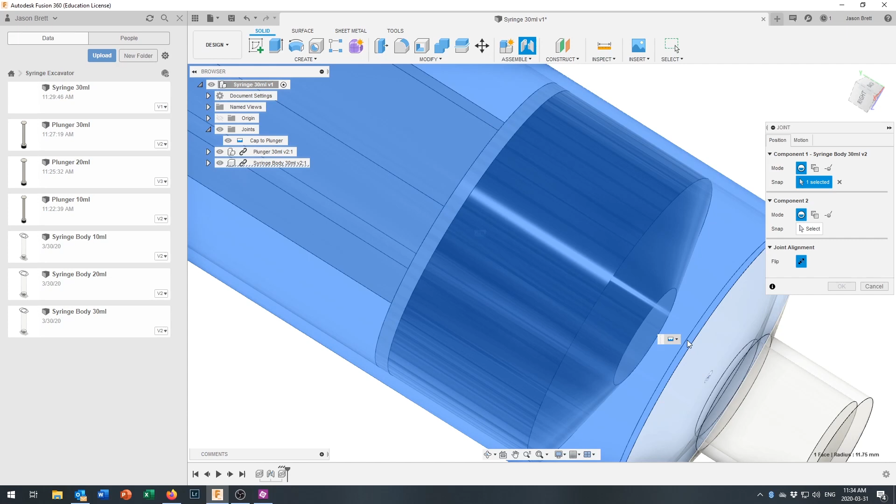We're just going to continue, and it'll put it back where it began. What we're going to do is find a connection point right along that center axis, and then we are going to join that to that center axis.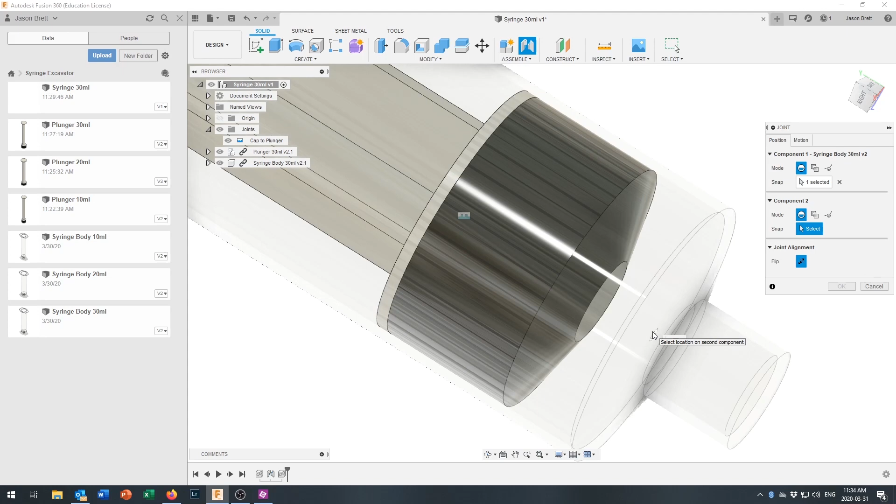If we come in here and select motion, actually it didn't bond in there. Come back to position right here. Oh, we still need to select the second one on here, so we picked syringe body. There we go, I've got to get the syringe face.

And look at that, those two just slide together right in there, and that became a rigid joint. So it does take you a moment to make sure you've got the correct connection points. If you ever mess up, you've got really good undos, just undo and go back in there. It takes a while to get used to picking the different connections.

And come in here, we don't want a rigid joint, so I just went on the next tab here. Slider might work, but cylindrical is a better representation of what we've got going on right here. And if you click on the little animate tab now, you can see why that works better.

Now obviously that's going to run into some problems in real life. If we try to do that, we'll deal with that in just a moment. And let's say OK right there. Why do I always forget to turn my email off?

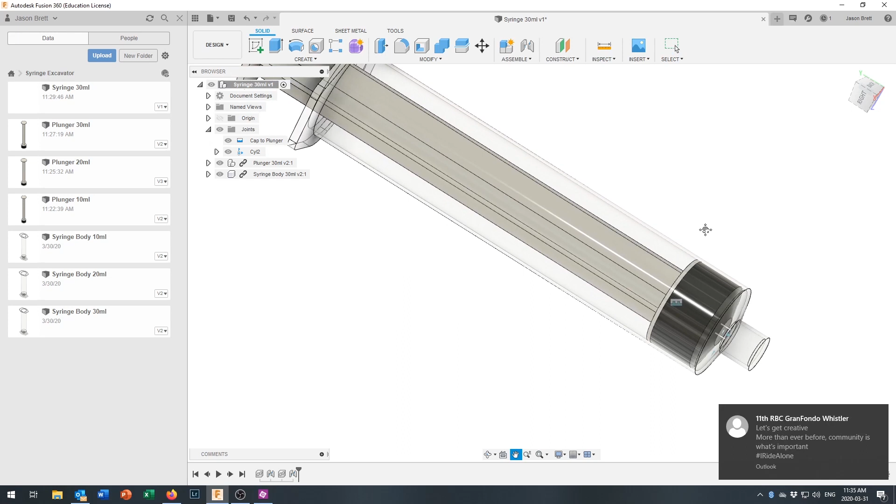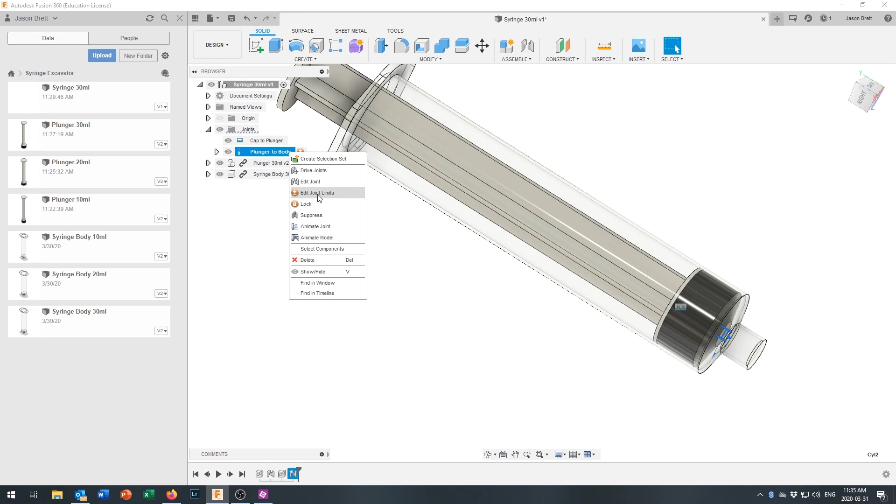Anyways, let's come over here and we will now come into this joint right here. If you want, you can rename it. This one would be plunger to body. And what we're going to do is use that little arrow right there, or you can just right click and go edit joint limits. That's what the little arrow right there is for.

And we are going to limit the motion in the sliding direction, because a cylindrical joint can either rotate or slide. We're going to set a minimum to it, and the minimum right there at 0 is pretty good. If I look at it from the perfect side right here, you can see there might be a little bit of space right in there.

Let's try what happens if I set that to -1.5 millimeter. That ties it up almost perfectly. That gives us a pretty perfect range of movement right there.

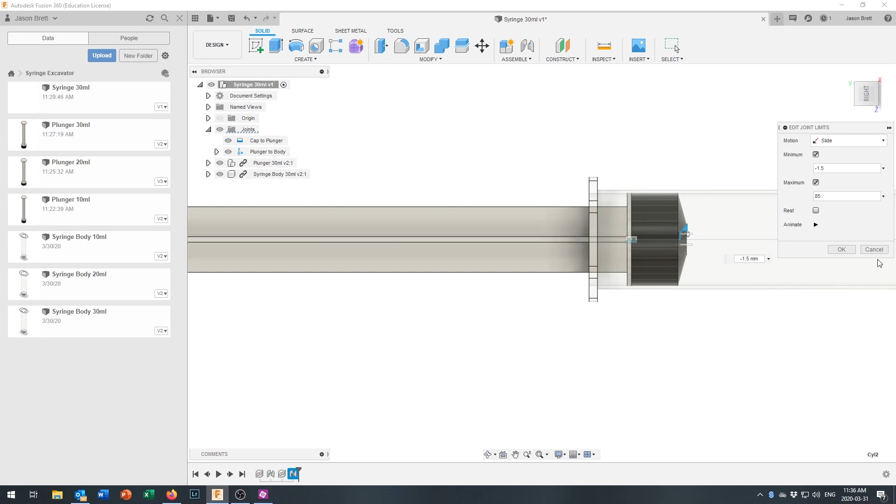And let's go to our maximum. We should be able to just click and drag right here, but I'm just going to try typing in some numbers. Let's try 80. We don't want to come much further than that, 85 right there. If you go much further than that, that syringe is going to pop out and you're going to lose all sorts of control. So we'll just click on OK right there.

And now we've got our syringe stuck in there. We've limited the range of motion, but we can't see that yet, because when I pick that up and drag it, everything still moves. We need to tell it what's supposed to be moving and what's grounded.

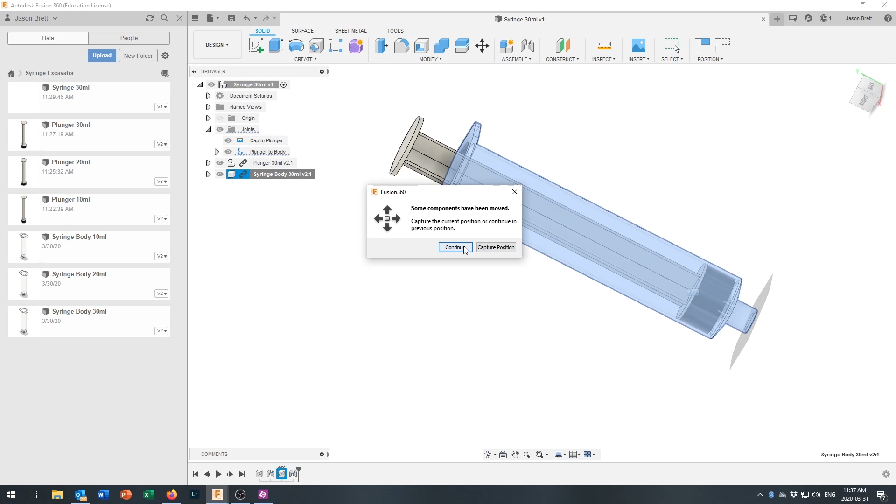So what we'll do is come in here, I'll make the syringe body, right click on that, and I'll tell it to ground the syringe body. We'll just continue from their position. You can see a little grounding tag pops up in there, and this little pin shows up right on here, showing that that is grounded.

And now, if I grab this end and slide it up and down, it slides up and down, and it remains stuck inside the syringe, which is great because now we're going to be able to use it in some other components as we build up larger and larger assemblies.

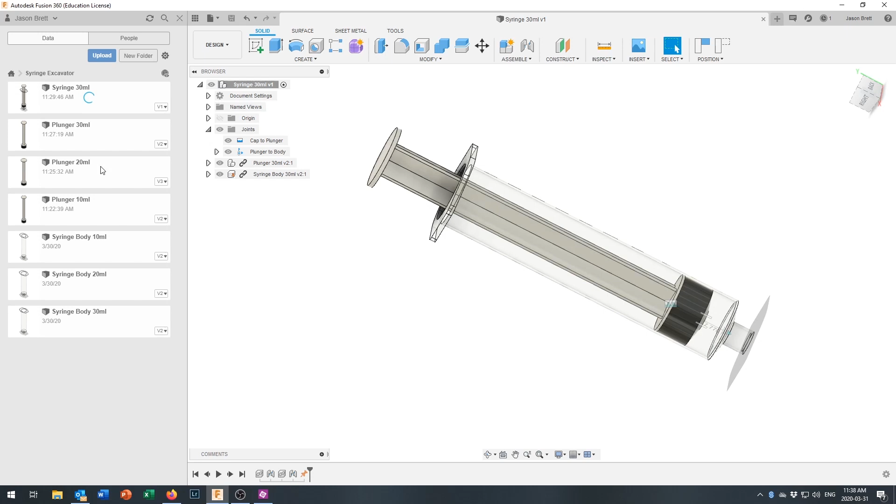Okay, so go ahead and save that. There is a 30 milliliter syringe body. Go ahead and do that for the 20 milliliter syringe and the 10 milliliter syringe, and you'll have a selection of syringes that can move up and down and rotate back and forth, and we can start putting them together.

If you got a sense for how that jointing was working, you now have a clamp that will go around a 30 milliliter syringe that you could clamp right down here, and you also have a cap that can go on the head right there. Go ahead and try that. We're starting to get onto some pretty cool stuff. Have fun.